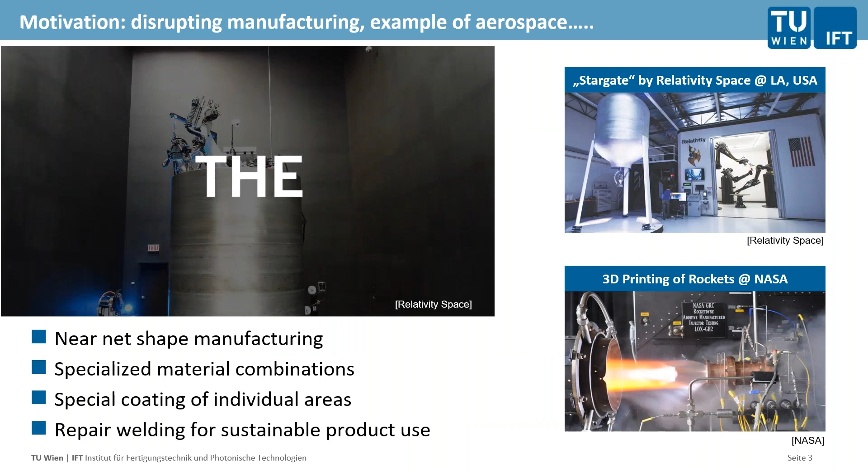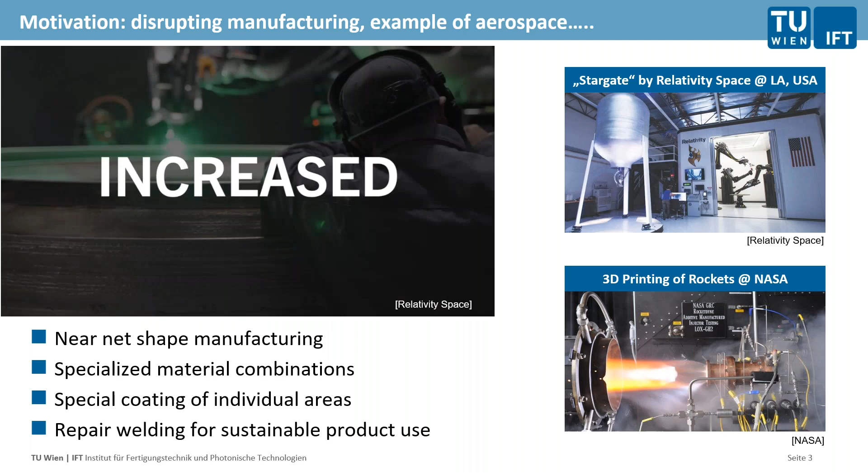Especially talking about additive manufacturing, we don't think that needs a lot of introduction. In the last years we all know how additive technologies ramped up in the markets. Various providers are in the market by now, and there are several different technologies to look at for various applications. For this presentation, a little note in advance: we focus a bit more on the topics of DED and wire arc additive manufacturing, so we are not talking a lot about powder processing for various reasons, which you will see in the presentation.

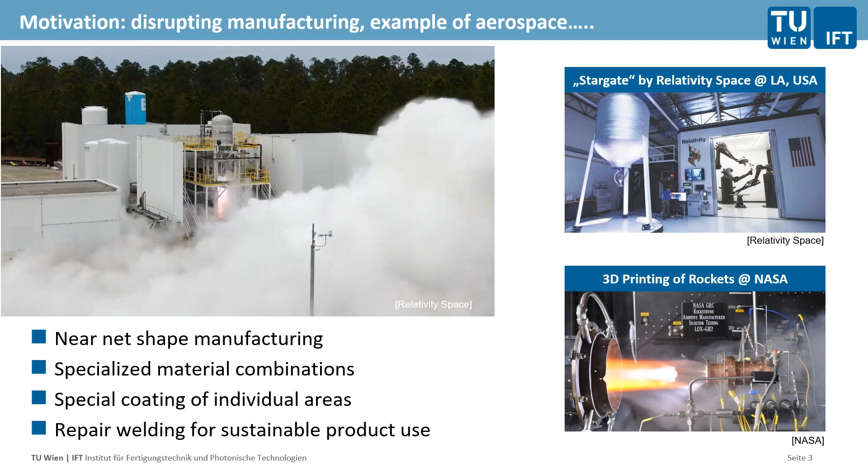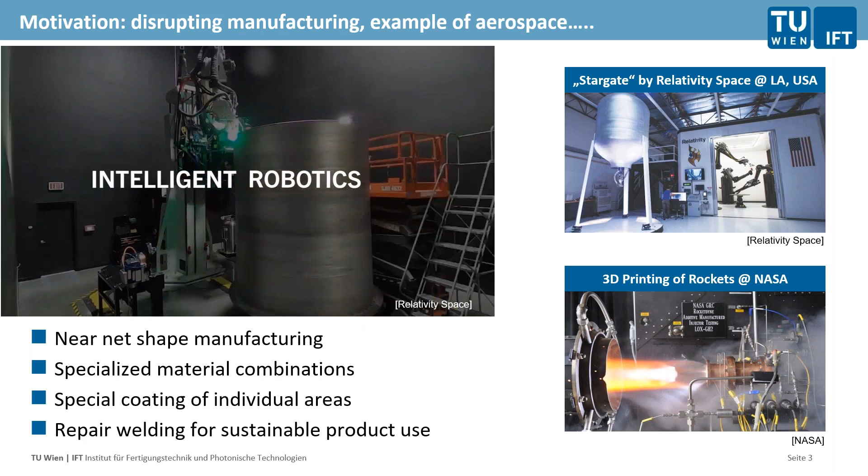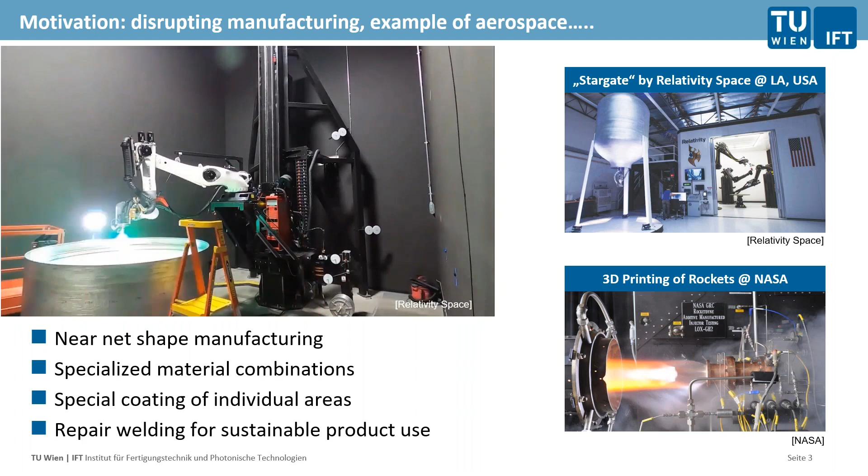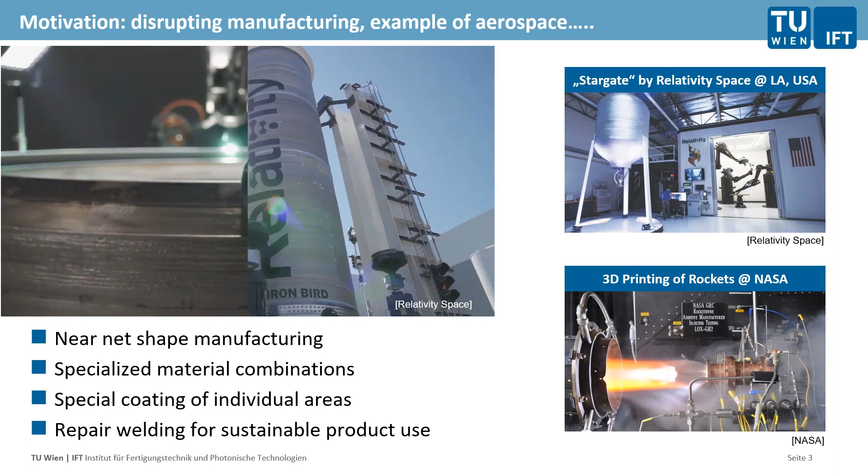But in general, a lot of what we do here is not only for space and NASA and a lot of big companies and institutes. There are a lot of advantages also for smaller companies and for a wider industry using additive manufacturing, such as near net shape manufacturing instead of manufacturing from a big piece of material. You have new opportunities to combine material in specific regions, and the opportunity to use special coatings when it comes to specific areas of your part that need special functions.

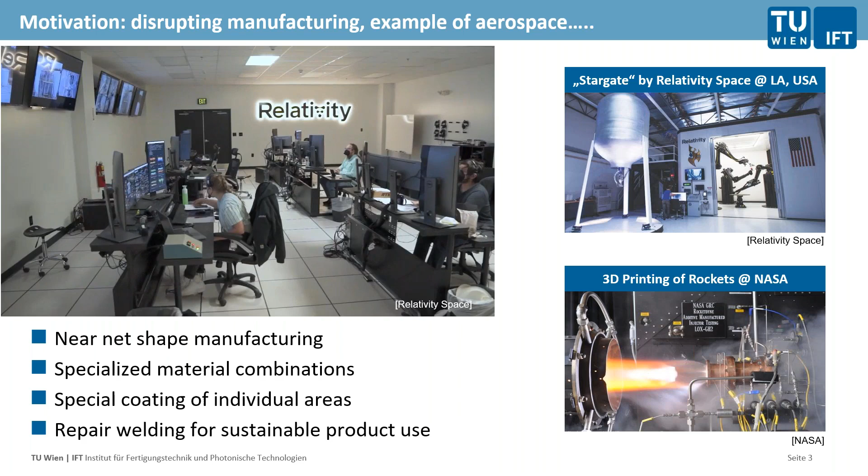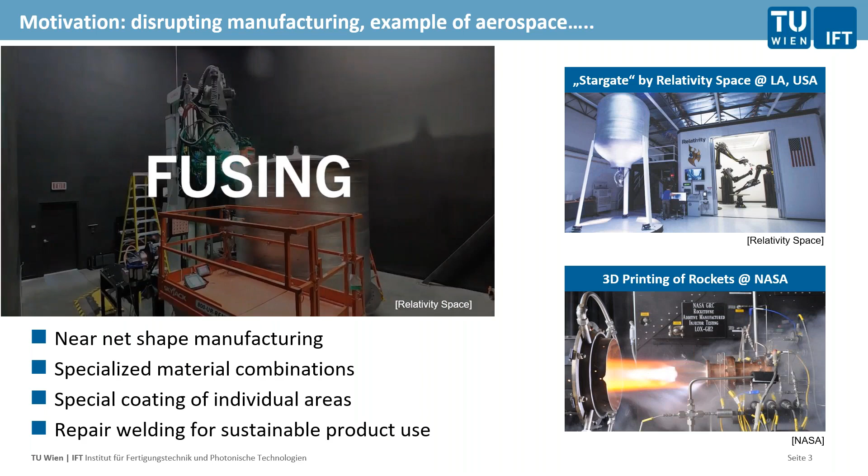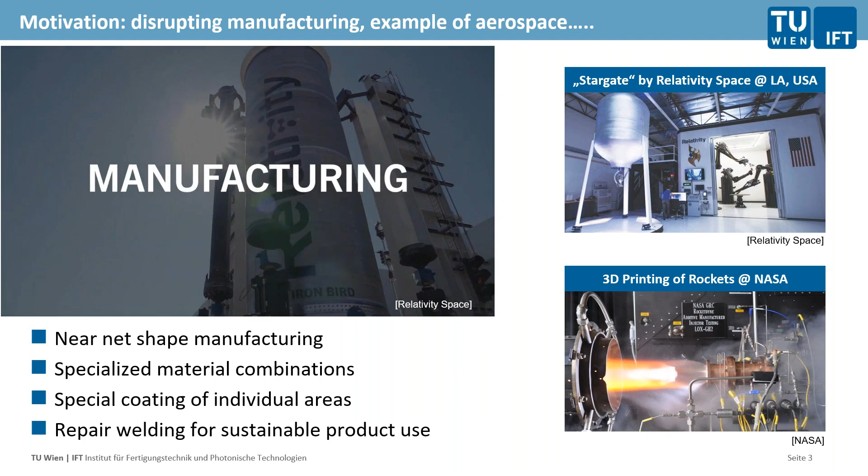An important topic, especially these days, is sustainable production, energy efficient production. Repair processes gain a lot of movement, so we try to use parts and components via repair services as long as we can in the value chain before we go back to the original road and start the full recycling processes of such a material. Very often parts are 80%, 90% working, but just a few features are worn off or broken off, and additive technologies can help here with a quick, fast repair service, keeping those materials in the loop.

These things we are researching currently in a project called AdProcAdd, Advanced Processing of Additively Manufactured Parts. We're actually a consortium of several research institutes. In Austria, we have FOTEC and TU Wien IFT. In Germany, we have colleagues from Schmalkalden Machining Institute, from Stuttgart, as well as from Dortmund.

Belgium is also joining the program with KU Leuven and Thomas More University of Applied Sciences. All of the funding and processes going on comes from the CORNET Collaborative Research Network, handled by various clusters and funding agencies such as FKM, EcoPlus Niederösterreich, and FFG, etc. Everybody participating is important to be known.

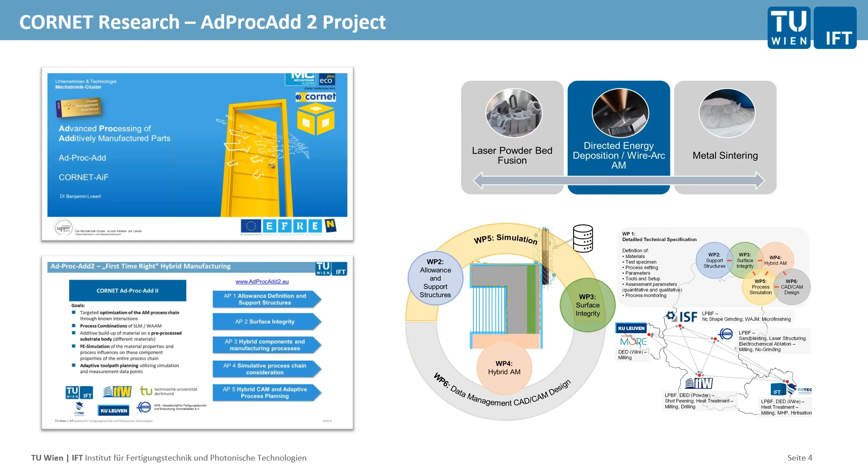AdProcAdd 2 - we already had a first project, the numbers indicating that, which was quite successful, focusing a lot on powder bed processes. KU Leuven and TU Wien are now moving, as I mentioned, more towards wire arc additive manufacturing processes and looking into manufacturing using those technologies.

Especially here, I would like to show you a little use case that we did in our laboratories, and from where I also derived the title of the presentation. It's called hybrid manufacturing. Hybrid in that case means we combine additive technologies with subtractive technologies, which is one focus point in the CORNET research project AdProcAdd 2.

So we look into whether those hybrid process chains can have advantages when it comes to saving material, saving energy, saving process time, saving cost. All of that is a factor that we look into with some industrial partners who are also part of the research project.

Just to give you a little insight into what we're talking about - hybrid process chains. There are different versions. You see here one cell that was designed by TU Wien and is tourable in the facilities here in Vienna.

You can see on the right a robotic welding cell from the company IGM, an Austrian company, and on the left side a machining center from the company EMCO in that case, and in between you have a robot who is manipulating the parts.

With such a cell setup, the required cell controller, and the programs, we have the opportunity in general to run an automated process from a welding robot where the part buildup happens to the machining center where you create the actual surface that you need for your application.

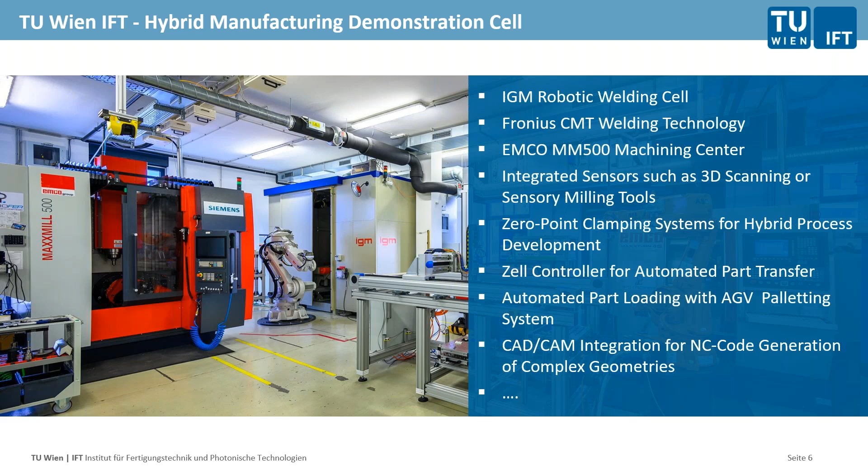That's the use case that I want to quickly go over with you, and it's actually a very nice one because it was done at our university by two students.

One student was responsible for the design of this speedboat propeller, and the picture on the top right is actually the student in such a speedboat in the US. It's quite a hobby of his, and he designed a propeller that he needed for the races.

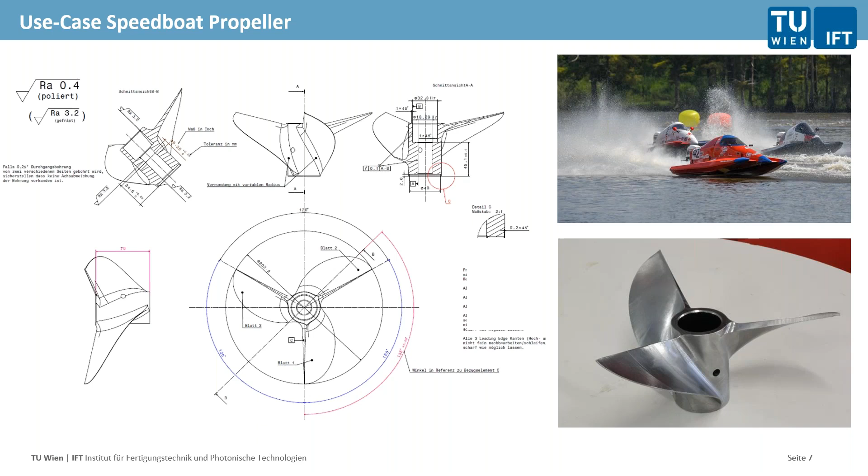We only had conventional manufacturing technologies available, and then we said, why not try something new? Why not try for such a geometry maybe an additive and subtractive process combined, creating a hybrid machining process. With that, we went into the machining cell and tried to make it happen.

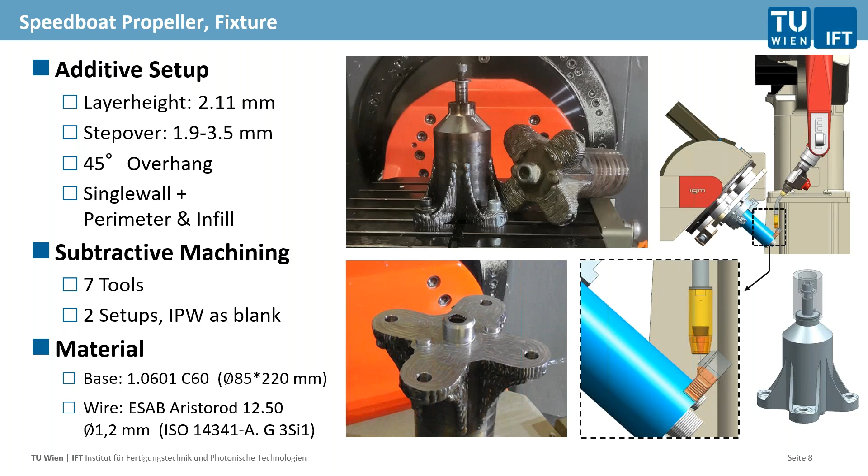In the beginning, it was mentioned trial and error, and from my point of view, that's still very true. A lot of what research institutes are doing these days is trial and error handling of additive processes, trying to figure out what are the right process parameter combinations for certain materials, and also what's the right build-up strategies.

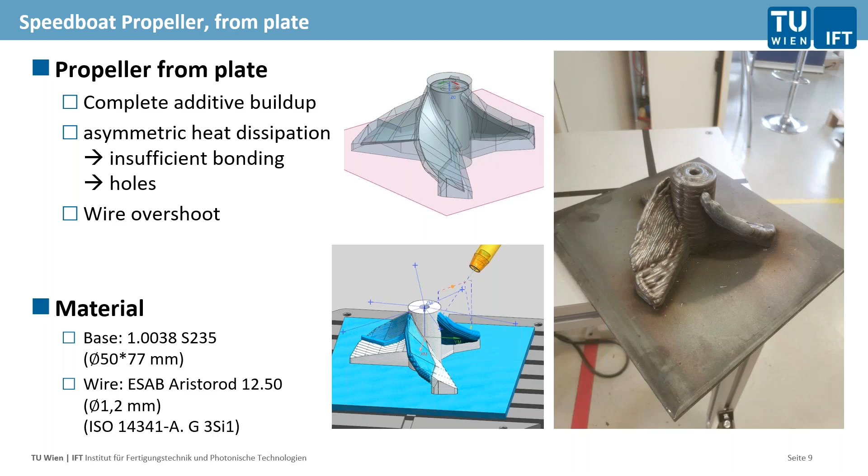You can see here our first shots on the propeller, really from a base plate. We developed too much heat, too much energy into the process, and the welding path was not working out. We had insufficient bonding, a lot of holes in there, so that was not a strategy that worked. So we decided to actually create a basic cylinder done by a turning process, and we only weld the propeller blades then on the side to reduce the amount of energy and heat we put into the part. That worked much better, and I'm sure you know some other geometries and use cases in that direction.

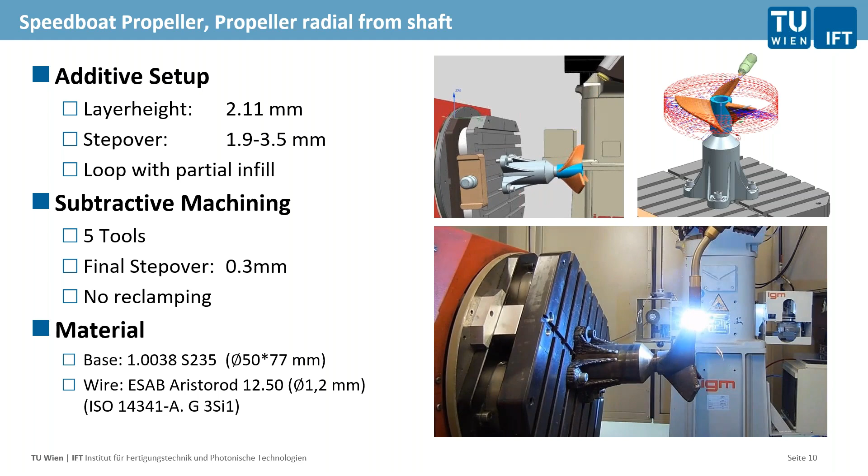That's actually looking now very easy when you look at the videos. Still, there is a lot of work going into the trial and error phase, a lot of work going into thinking about the fixture, about the process. A lot of unexpected things are happening when you use such a hybrid process. So we're very happy that it worked in that specific use case. I would like to highlight the results before I hand over to my colleague, which I think are more interesting for you at that stage, because that's quite significant.

The material waste that we have compared to a conventional machining process, where we would machine the part out of a full cylinder, is obviously significant. Removing all the material out of the cylinder is a lot of waste. Sometimes you can use the chips and recycle them, reuse them, etc. But still, when we talk about recycling processes, you don't want to do that anymore in the future. You don't want to create a lot of waste that you then need to recycle in early process stages. All of that is effort, uses energy. Better is you don't have that waste in the first place, right? So a near net shape geometry is helping a lot.

But it was also quite surprising when you combine the machining times. A conventional machining on one machine, only the cylinder done on the turning center, compared to a hybrid process, was also half of the machining time, providing a lot of saving potentials as well. So it's not only that the chips can be reused, it's also that the machining of those chips in the conventional case just takes a lot of time and creates a lot of tool wear, and all of that needs to be taken into consideration.

So when we're adding something to our title for the presentation, we try to give you a strong statement. We try to motivate you to look into those technologies, look into use cases, rethink your current portfolio with additive technologies, various ones, and just really get creative when it comes to creating new options for your manufacturing chains. There is a lot to do. 50% savings was good, but there is still plenty of work and plenty of opportunities.

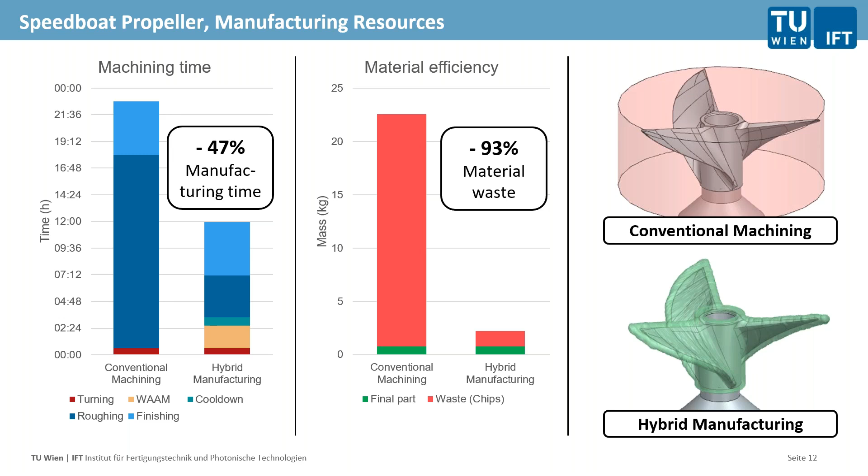Well, thank you, Mr. Mautner, for your nice presentation. Now, I will give a specific use of our additive manufacturing in terms of multi-material deposition. This presentation will be a bit more technical, but I'll try to keep it interesting.

In the next slide, I will tell you about the application and the issues regarding the manufacturing of multi-material parts. The applications are mostly used as corrosion protection for pipes or pressure vessels in the petrochemical industry, where there is a corrosive environment, and also as transition parts in functionally graded materials. For example, in a bimetallic part, when we are moving from material A to material B, in between we will have a multi-material part which does the transition in between to have a uniform property change from material A to material B.

There are quite a lot of issues for wire and arc additive manufacturing of multi-material parts. For example, when we use two different materials, there will be two different properties in terms of chemical and physical, like the melting point and also the fluidity of the material. And for each material, we need to use different welding or deposition parameters.

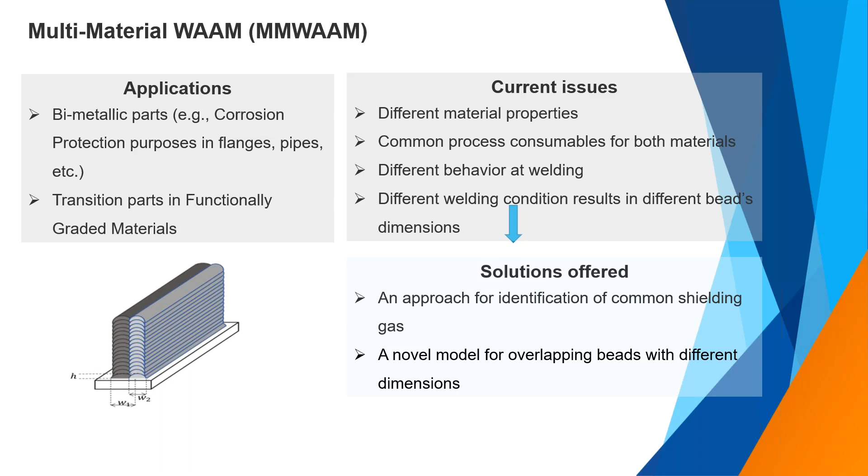In the next slide, I will give a short explanation of the principle of the process in wire arc additive manufacturing. The wire comes through a nozzle which is connected to a power source. It gets melted by the power of an electric arc between the substrate and the wire, and there will be a shielding gas to protect the wire and the molten pool from the air.

So three aspects of this process have quite a significant impact on the results: one is the shielding gas which is used, the other is the stability of the arc, and also the shape of each bead, which is the cross section of each layer in this process. Now, these three aspects have been investigated for multi-material when we are depositing two different materials next to each other.

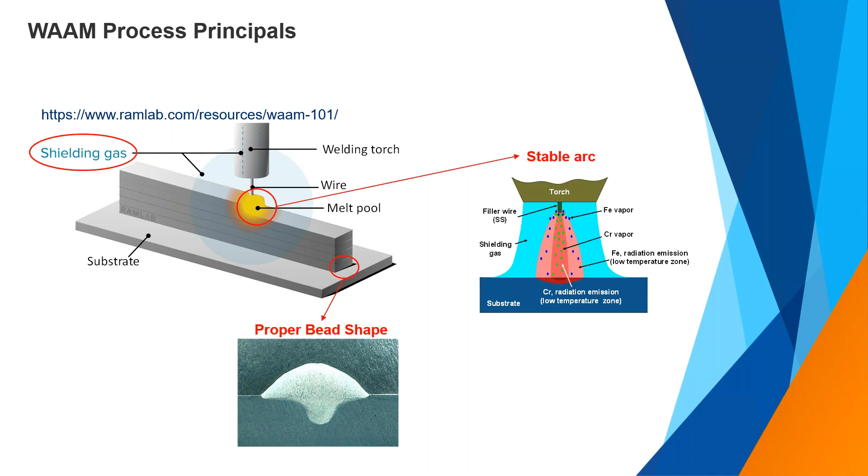In the next slide, this is the deposition setup at KU. You can see the two power sources, Fronius CMT power sources, which are both connected to a twin torch. This torch can handle two wires, as you can see on the right figure. And now we are using two different materials.

And the deposition mode is sequential. For example, first material A is deposited, and material B is deactive, and then the torch moves the same path with deposition of material B.

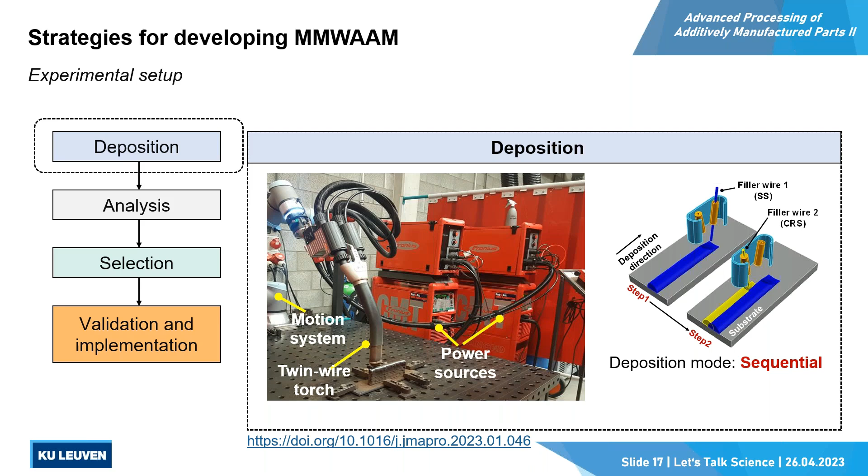In the next slide, I will explain how we analyze the stability of the arc. So first, we want to find the common shielding gas for these two materials. As a test case, we used stainless steel and a creep-resistant steel.

At the same time, in the deposition, we collected all the current and voltage data of the process using a data acquisition system. And then we compared two gases in terms of the different graphs in current and voltage.

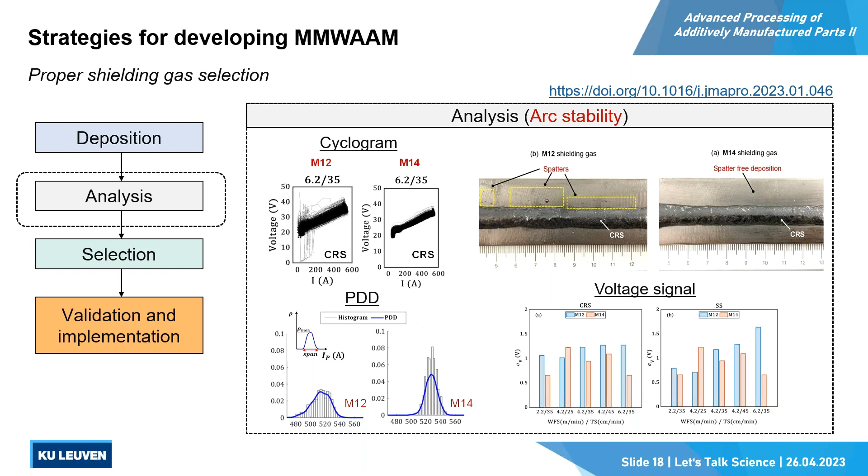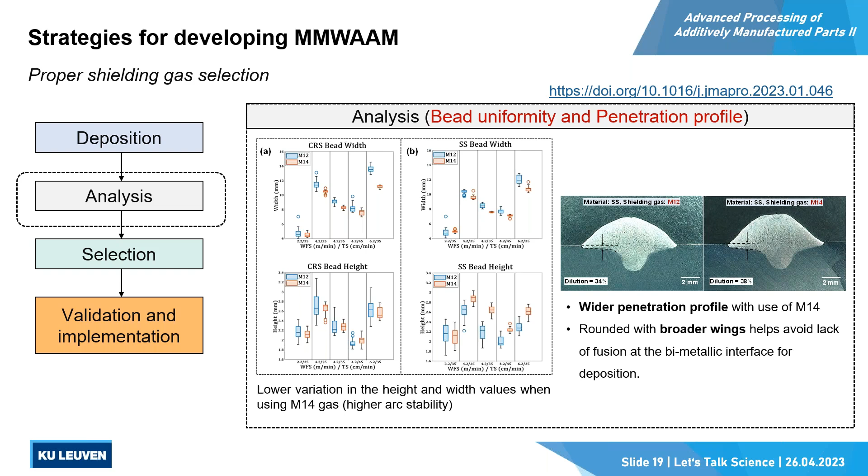This was for the arc stability and the shielding gas selection for two materials. In the next slide, I will explain about the deposition strategy.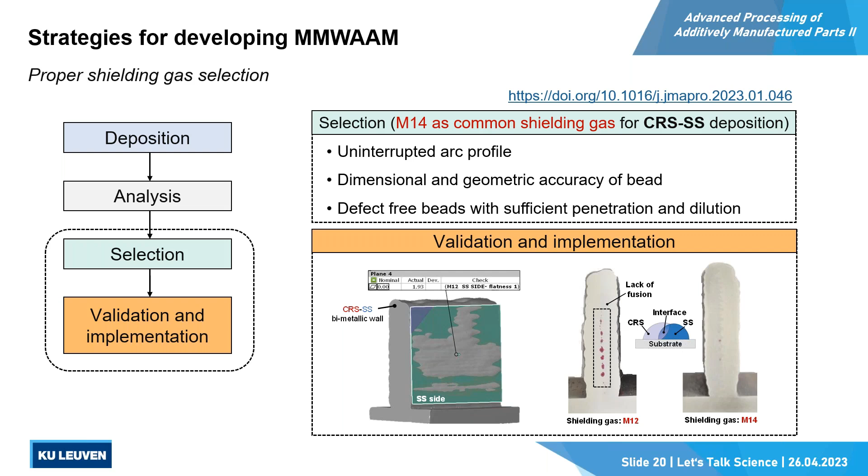And also it has decreased the flatness of the wall, which means lower machining allowance, and that's how we can save material in the multi-material deposition. In the next slide, this is the deposition strategy when we are going to deposit two materials.

When we are depositing overlapping beads which have a common overlap area, the offset distance between these two beads is quite important. For a single material, this has been done and is well known in the literature, with some existing models. But we try to find the optimum offset distance in multi-material, between two materials. When we have two materials, the dimensions of these beads are different, the properties are different, so we need a new model to find the optimum offset distance.

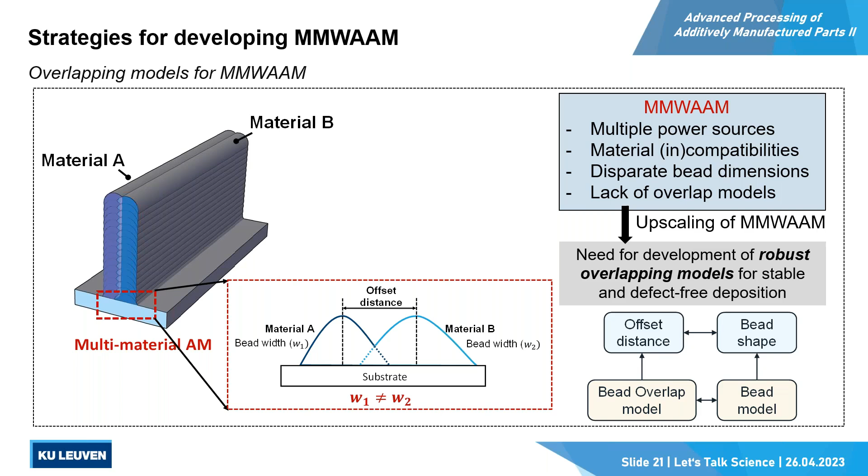In the next slide, to show the significance of this distance, you can compare these two beads which have been deposited with a slight change in the offset distance. On the left, when the second bead is deposited next to the first bead, the molten pool has spread to the other side, and there is a large gap between bead 1 and bead 2. This gap will remain in further layers and will result in a lack of fusion.

But with a slight change in the offset distance between these two beads, we can have a material flow from bead 2 to bead 1 to have complete fusion. With this model, we try to find the proper offset distance, which we call the critical offset distance, to have an optimum surface on top and also a complete fusion between materials.

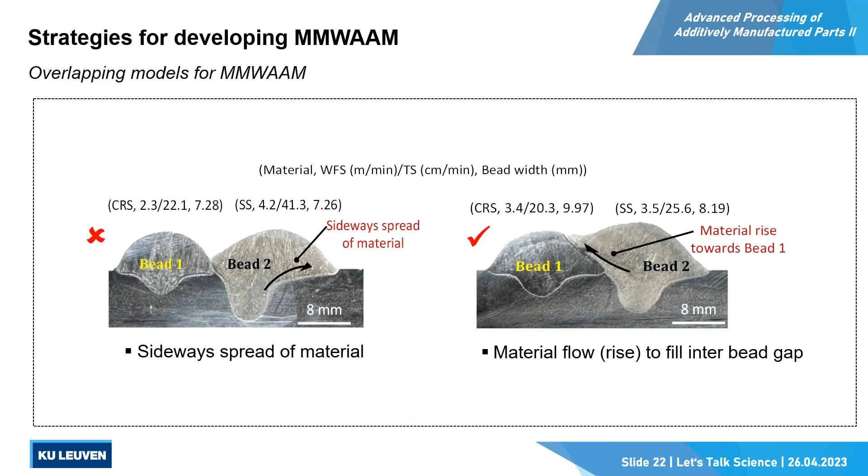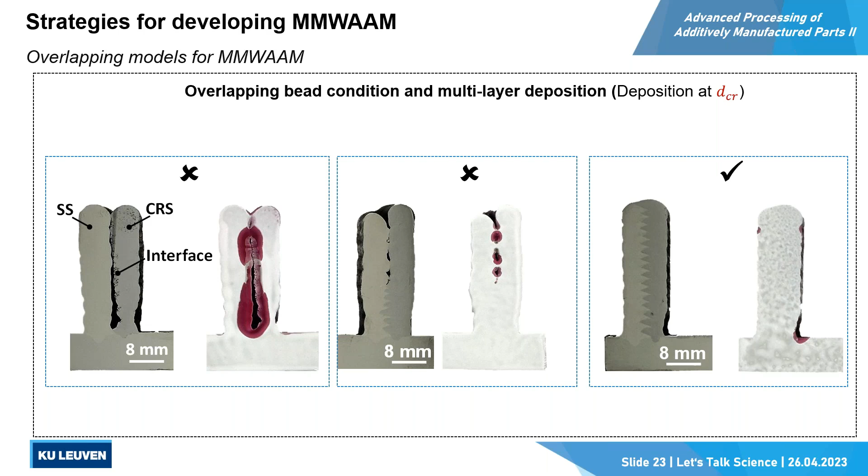In the next slide, this offset distance has been compared to other models. You can see that with two different materials, if you use the previous models valid for single material, shown in the middle and on the left, there will be a lack of fusion between the materials, and we cannot get an acceptable component. But on the right, using the new model, we are successful in having a defect-free wall. In the last slide, I will show some test cases.

On the left, there are three walls to show the repeatability of this model, all three deposited defect-free. There is also another structure, which we call a matrix or chess structure, deposited using the same model by depositing material A, material B, and so on in each layer. This proves that this model is valid as a design guideline when depositing multi-materials.

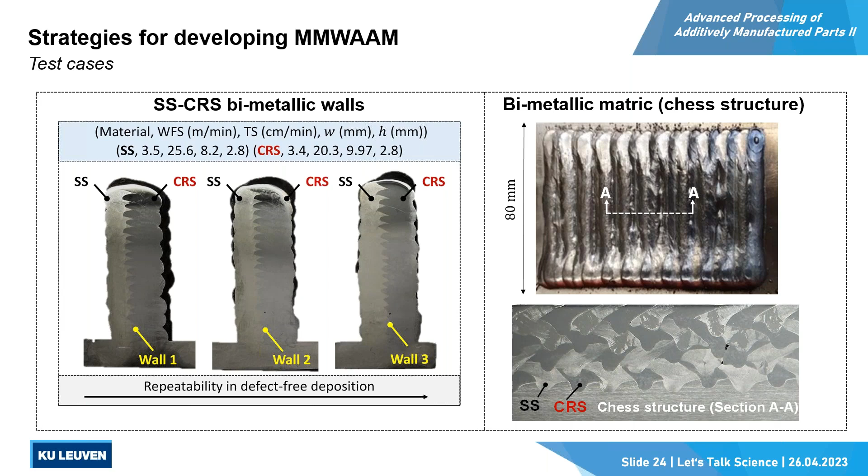That was my last slide. I thank you for your attention, and if there is any question, you're welcome to ask.

Dr. Schäfer. Yes, I just switch on my mic. So yes, thank you for this very interesting presentation.

As far as I can judge it from a technical perspective, it's very interesting, and it shows the requirements you have to take into account when going into these kinds of additive processes. My first question is this: you mentioned there is less time and less scrap or less material used, but could you give a statement on the cost perspective of this process in single material or multi-material? This is always a question, because classical production methods like cutting may be cheaper per piece than additive, especially for larger parts or larger numbers of parts.